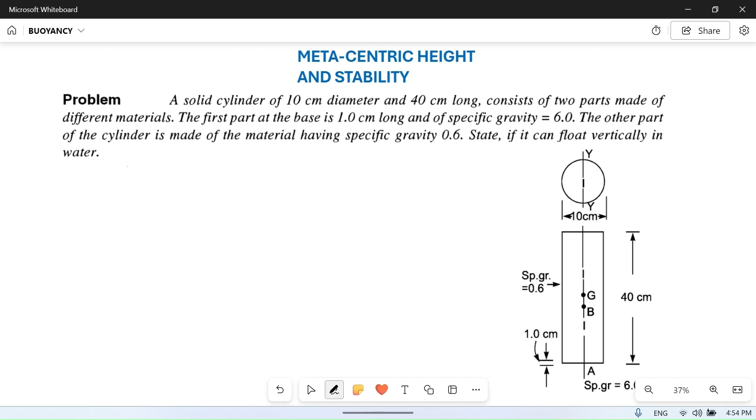A solid cylinder of 10 centimeter diameter and 40 centimeter long. So diameter D - we will note the important parameters to solve this question. D is equal to 10 centimeter, and L is equal to 40 centimeter.

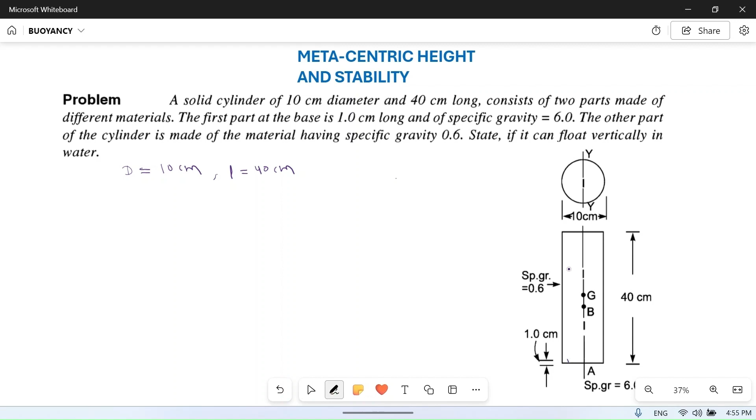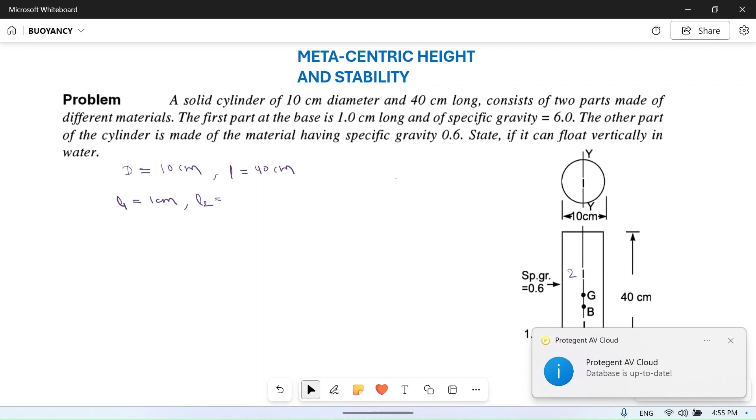It consists of two parts made of two different materials. The first part at the base is 1 centimeter long. So this is first part and this is second part. This is only 1 centimeter long. So L1 is equal to 1 centimeter. L2 is equal to, this total is 40, so 40 minus 1 is equal to 39 centimeter. This is L2.

And the specific gravity of part 1 is equal to 6, and the other part of the cylinder is made of material of specific gravity 0.6, this is the second part.

If it can float vertically in water - so we have to find and calculate if this cylinder can float vertically in water, or if it will fall down. Okay, let's see.

So what is specific gravity? Specific gravity is density of material divided by density of water. So density of material rho m is specific gravity into density of water. What is density of water? It is 1000. So Sg1 is 6.

So rho 1 is 6, specific gravity into density of water, which is 1000 kg per meter cube. It will become 6000 kg per meter cube. Similarly, rho 2 will become 0.6 into 1000, which will be equal to 600 kg per meter cube.

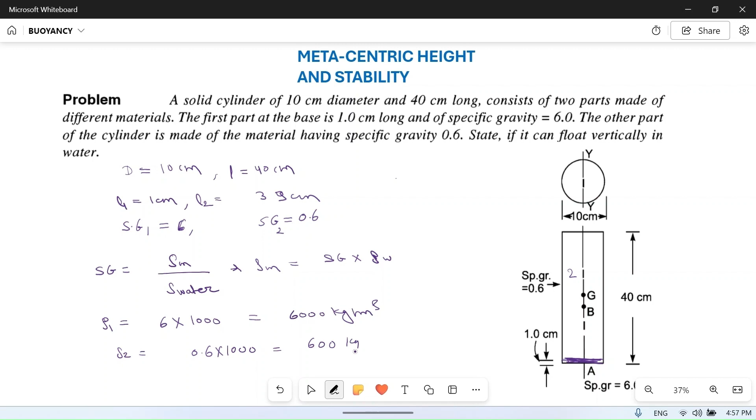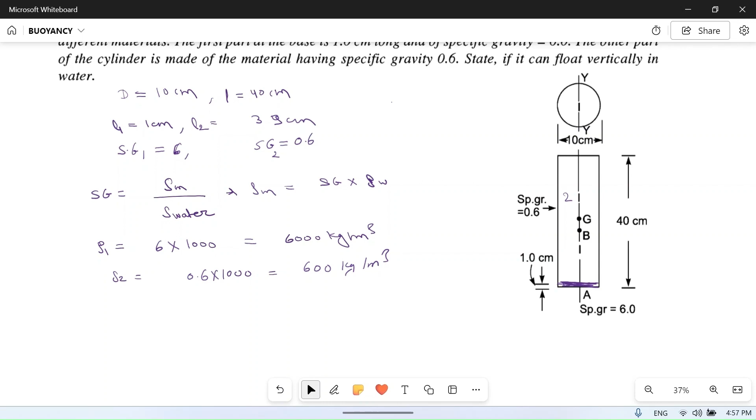Now there are two parts, part 1 and part 2. So what will be the center of gravity? Center of gravity is for the whole part. Suppose center of gravity of first part is G1 and center of gravity of second part is G2. Then G, the center of gravity of the whole cylinder, is W1 G1 plus W2 G2 divided by W1 plus W2, where W1 and W2 are the weights of part 1 and part 2, and G1 and G2 are the center of gravity of part 1 and part 2.

Suppose we are taking the center of gravity from point A. So what will be the weight of part 1? W1 will be equal to - this area is pi by 4 d square into length, which is 1 centimeter.

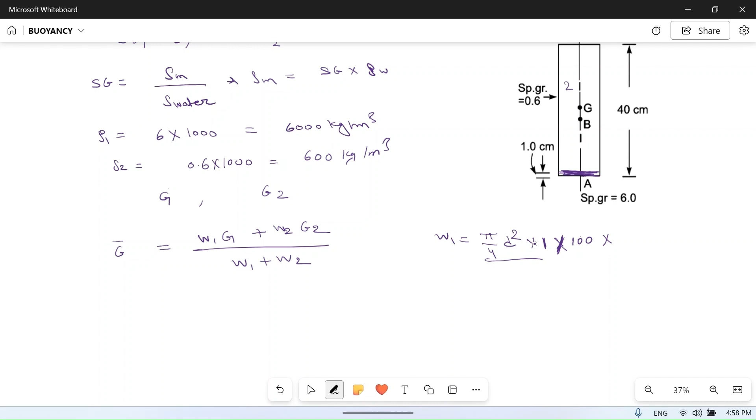1 centimeter into this is volume, and density is 6000 kg per meter cube. So if density you are keeping in meter, then this length should also be kept in meter. So this 1 centimeter means 1 by 100 meter.

This is pi by 4 d square L into 1 divided by 100 - this is volume into density, which for the first part is 6000 into G, 9.81. And W1, if we calculate it, then it will become pi by 4 into diameter of the cylinder, given as 10 centimeter, 10 centimeter means 0.1 meter, into L which is 0.01, into 6000, into 9.81.

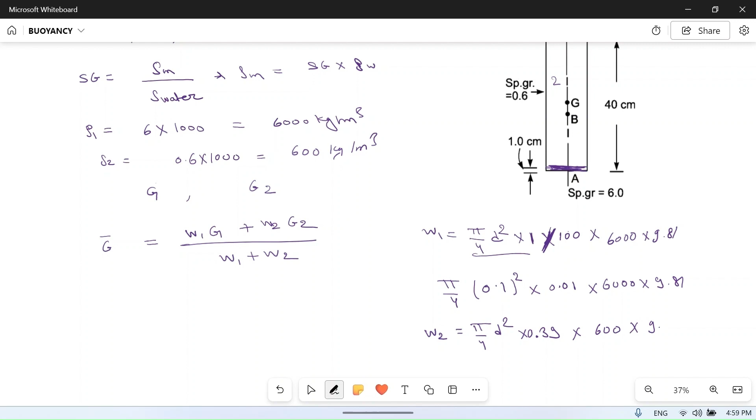Similarly W2 for the second part is pi by 4, D is same, into L is 39 centimeter now, so 0.39 into density is 600 into G is 9.81. So we will keep these values here.

So center of gravity of the whole cylinder is W1, which is pi by 4 D square, 0.1 square, into L 0.01, into density 6000 into 9.81 - this is weight into center of gravity G1.

G1 is half of the height, so height was 1 centimeter, so half of the height is 0.5 centimeter, which is 0.005.

So what will be the center of gravity of the second portion? It will become 1 plus 39 by 2, divided by 100. This is in centimeter. Why this? Because 1 centimeter is already here plus half of this height, divided by W1 plus W2, so W1 is this, W2 is this, so W1 plus W2.

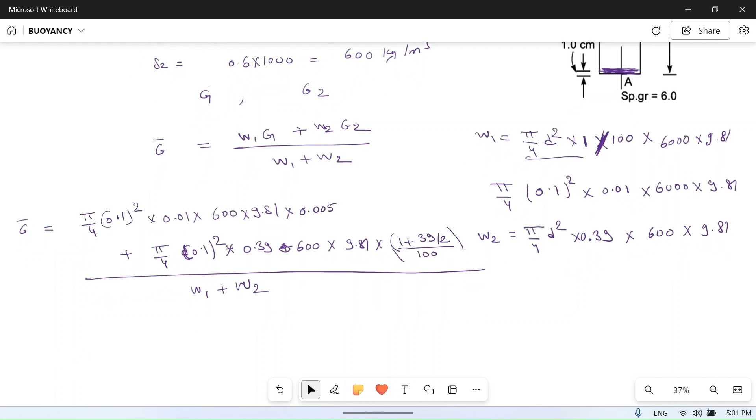So if you cancel pi by 4 D square, it is common in all the parts. If you put the values of W1 and W2 here and calculate, then you will get center of gravity G is equal to 16.42 centimeter, or 0.1642 meter. So this is the center of gravity of the whole cylinder.

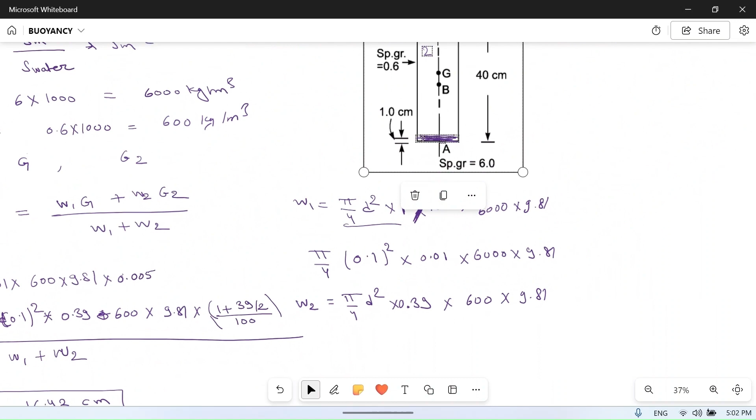Now, this is the diagram, let's put it here. Now this cylinder is floating in the water, so its weight will be equal to the volume displaced by water. So what is the weight of the cylinder?

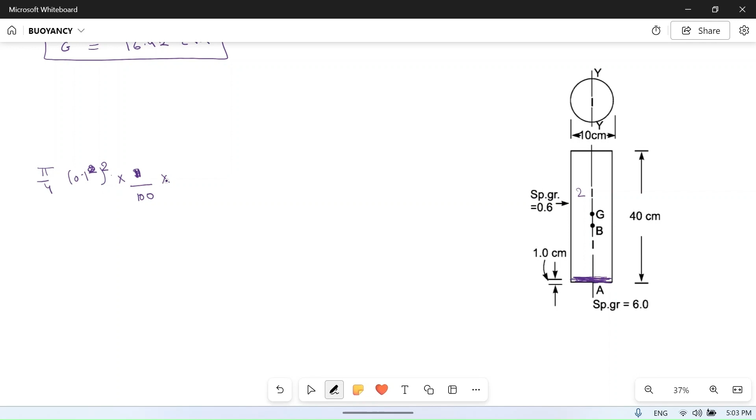Weight of the cylinder we have already calculated: pi by 4 D square is 0.1 square, into 1 divided by 100, into 6000, into 9.81, plus W2: pi by 4 D is 0.1 square into 0.39, this is L or H, into 600 density, into 9.81. So this is the total weight of the cylinder.

This will be equal to the volume of water displaced. So pi by 4, 0.1 square. Suppose height of cylinder, which is H, is submerged in water up to here. So H is the height of cylinder submerged in water. So pi by 4, 0.1 square into H by 100, suppose it is H in centimeter, that's why we divided by 100, into 1000 is the density of water, into 9.81 is acceleration due to gravity.

So if you calculate it, then you will get h is equal to 29.4 centimeter. So we have found the value of h.

Now, what will be the center of buoyancy? Center of buoyancy will be half of the height of displaced water, or half of the submerged cylinder. So it will become half into 29.4, so it will become 14.7 centimeter.

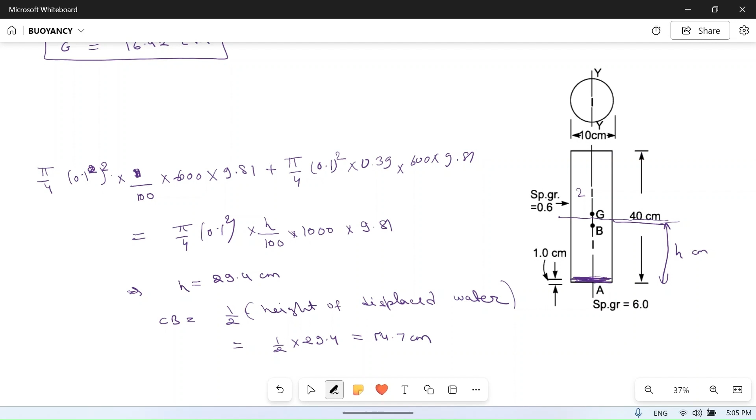Now, formula for metacentric height GM is equal to I by V bar minus BG. Okay, so I for this, cylindrical circular cross section, pi by 64 d to the power 4, is equal to pi by 64 into diameter 0.1 to the power 4.

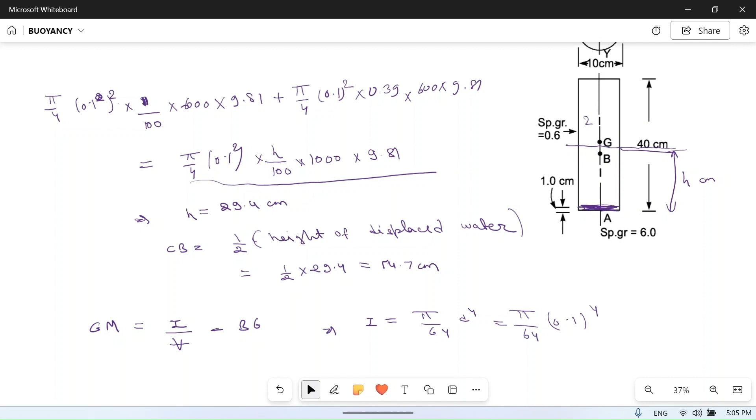And volume of cylinder in water, if you see here, if you put the value of h equal to 29.4, then it will become volume of water. So if we put the value of I here, pi by 64 into 0.1 to the power 4, divided by V, which is pi by 4 d square into 0.294. This is volume of water.

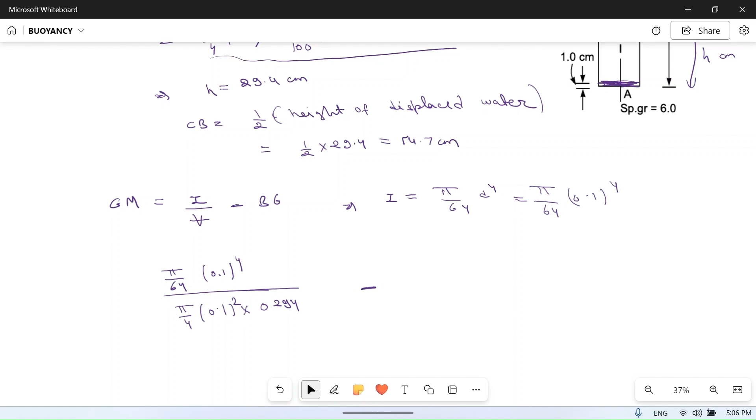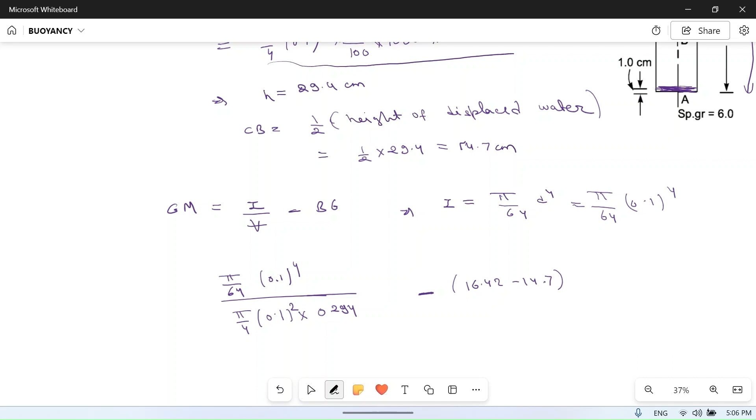So it will become minus BG. So what is BG? Distance between center of buoyancy and center of gravity. So it is 16.42 and this one is 14.7. So 16.42 minus 14.7. So it will become 0.212 minus 1.72. If you calculate, you will get minus 1.508 centimeter.

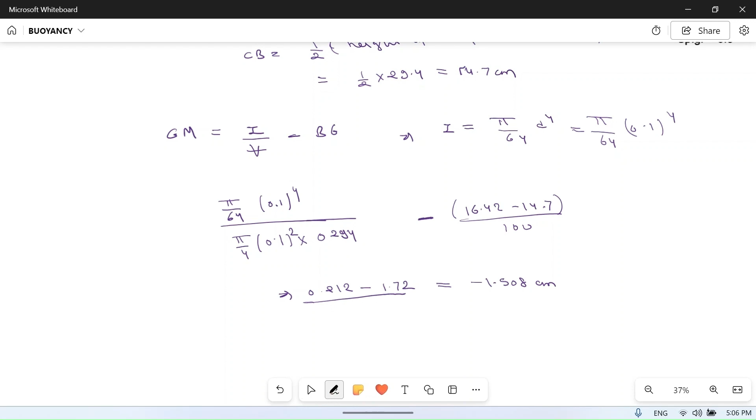Sorry, this is divided by 100 because this was in centimeter, and this will also be in centimeter. In meter, we divide by 100, so it will become minus 0.001508 meter, or sorry, it will become minus 0.01508 meter. So it will become equal to minus 1.508 centimeter.

So this is negative, if you can see, this is negative. So if this is negative, it means the metacenter is below the center of gravity. So if the metacenter is below the center of gravity, this is an unstable situation. So this cylinder will be in an unstable position and it will fall down. It cannot float like this in a vertical position.

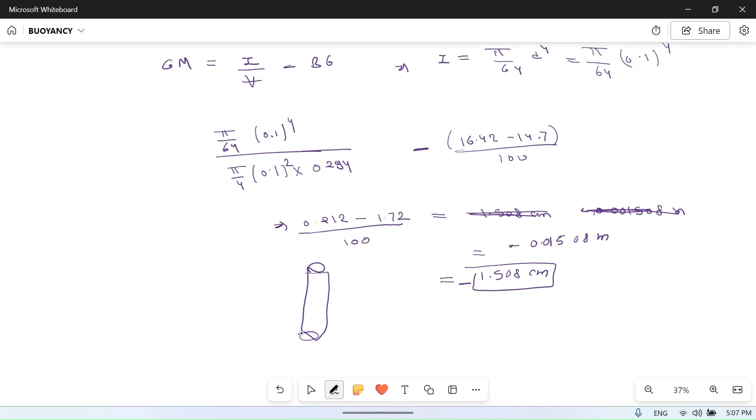So due to instability, if we just touch it a little bit, then it will fall down. Okay, so I hope you understood this problem.